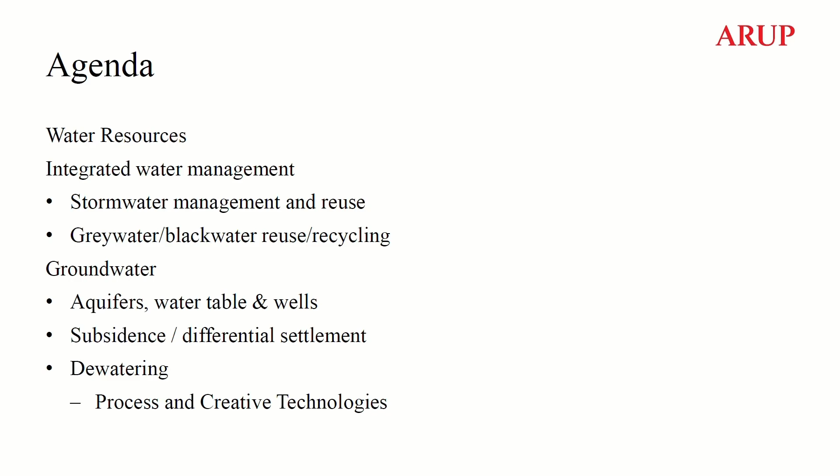So where is our water? About 97% of it is in the oceans. It has salt in it, so only about 3% is what we call fresh water, and of that, an even smaller percent is what we think of as a normal surface water source, like lakes and whatnot—only about 1%. There's a little more of that in groundwater, but for context, there is a lot of water in the world, it's just, if you don't know where it is, it's probably somewhere else in the cycle—it's probably in the ocean.

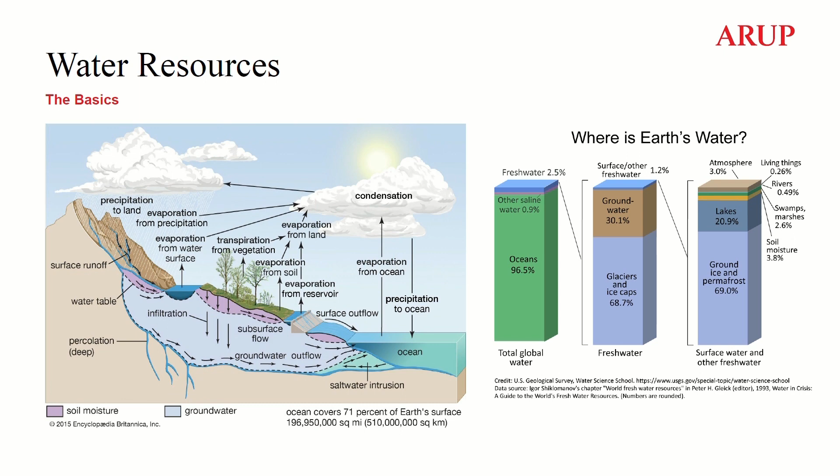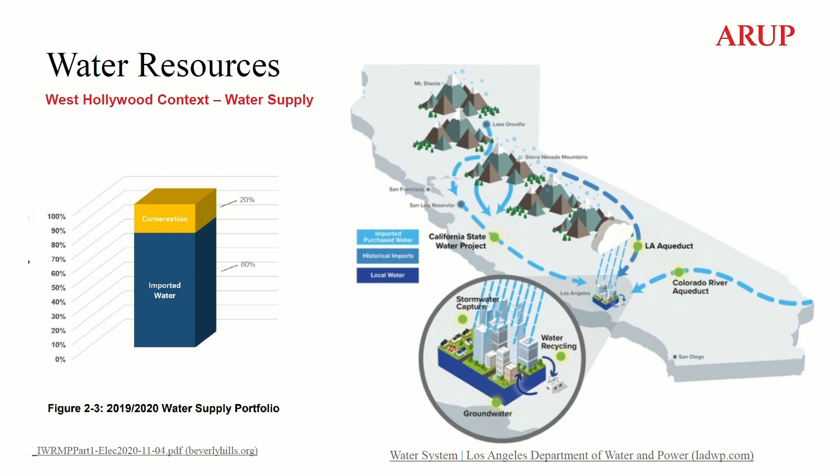But there's also a great little pop-out showing the local water sources, which includes stormwater capture, groundwater, and water recycling. And those are really what I want to focus on today, because those are part of the integrated water management that I'll be talking about.

Before we talk about integrated water management and that strategy, I think it's really important to define some terms that we've probably heard but maybe don't know exactly how they're defined. Potable water is water that is safe for drinking and showering. It's what comes from your municipal source, it comes right to your tap when you turn the water on. Non-potable water is exactly how it sounds: it's not drinkable, but it could be used for things like toilet flushing or watering plants.

Gray water and black water are both terms to describe types of wastewater. Gray water is wastewater that comes from sinks and showers. It doesn't include any organics from kitchen sinks or sewage from toilets. Black water would include all the wastewater, including that sewage from toilets and whatnot. Those two terms together are what we would call wastewater.

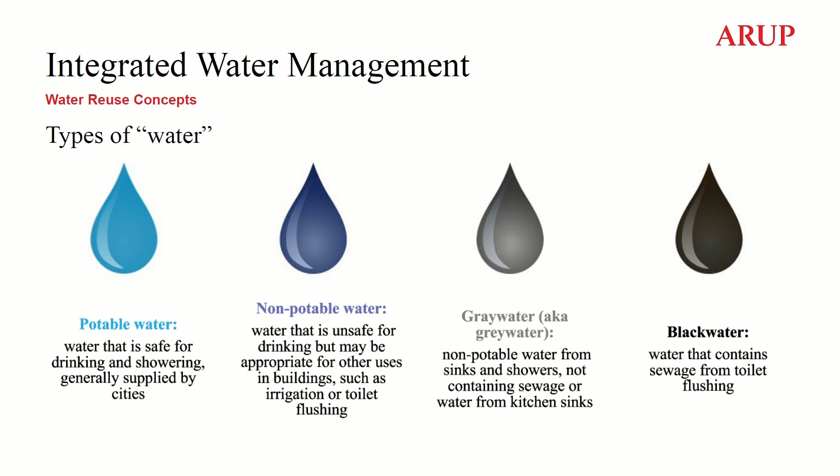Now that we know about those things, I can get more into the strategy of what we think of as integrated water management. This is basically the thought process on how to manage your water sustainably and holistically through the water cycle. Some of you might have heard the term net zero in the context of GHG emissions or energy. We also use net zero as a term for water use.

When you're trying to get to net zero, or when our clients are trying to get to net zero, what we try to do is say: how do you offset all of your potable demands from somewhere like a municipal source? You either reduce your demand, through conservation and efficiency, or you look at alternative supplies, like stormwater reuse, gray water recycling, black water recycling, or things like groundwater recharge and groundwater reuse.

Conservation and efficiency are definitely the easiest, the ones that people know the most about, but there's only so much that you can reduce your demand. You have to use some water. Even places like Las Vegas, where their water use is so low, I don't even know how they do it, you have to have some kind of alternative supply or offsets to get to that net zero.

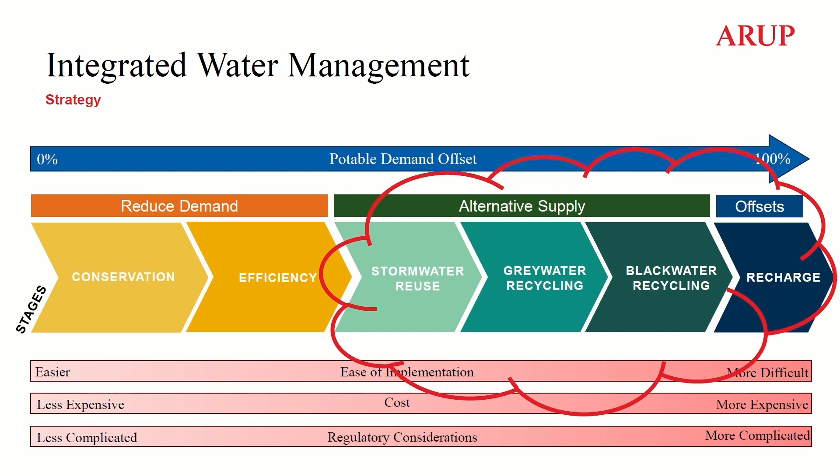Like Rick mentioned, there are water quality considerations with stormwater. Usually if it falls on a rooftop, it's cleaner than if it falls on something like a parking lot where there's car grease and whatnot. But usually some kind of treatment is necessary, especially in bigger developments and buildings like this.

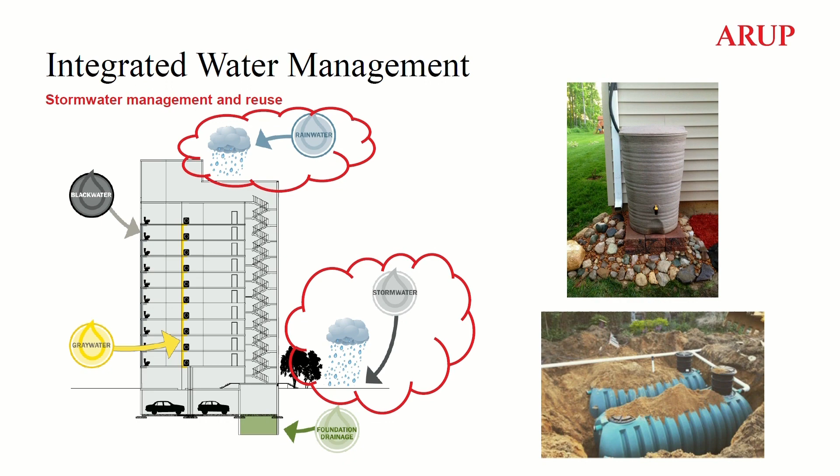So on to gray water reuse. Gray water reuse is capturing the gray water, which we talked about earlier, from washing machines, sinks, and showers, and putting that into a tank and reusing it for things like irrigation or toilet flushing. This does require some water treatment, probably a little bit more than for your stormwater, depending on what's in that.

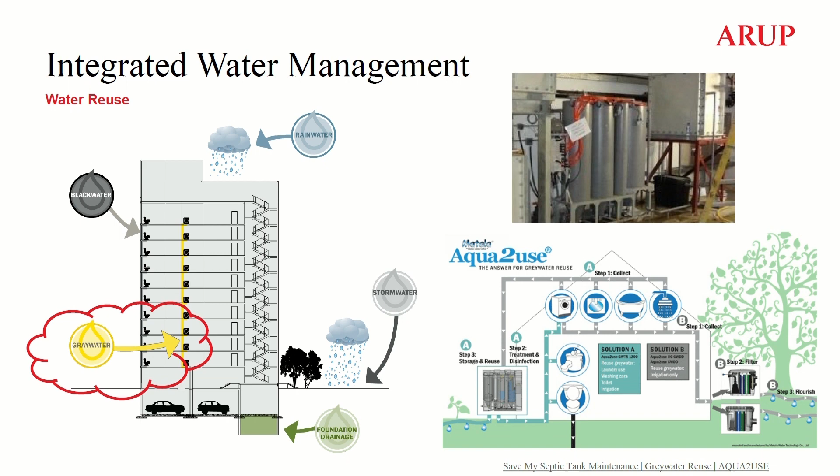Another thing you could do is black water recycling. That would include all the wastewater from your building. This requires even more treatment than gray water. It's kind of like a mini water treatment plant that you would have at your municipal system.

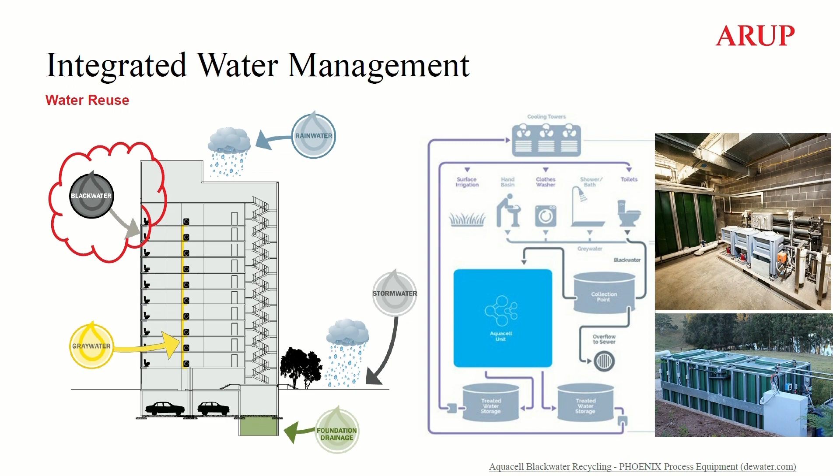I know Kim talked about heat island effect and everything getting hot. Well, what do we do when it gets hot? Turn on our air conditioners. Black water recycling and recycling of that water can be used as a non-potable source for cooling towers and cooling buildings. So it's a really good alternative supply for things like that.

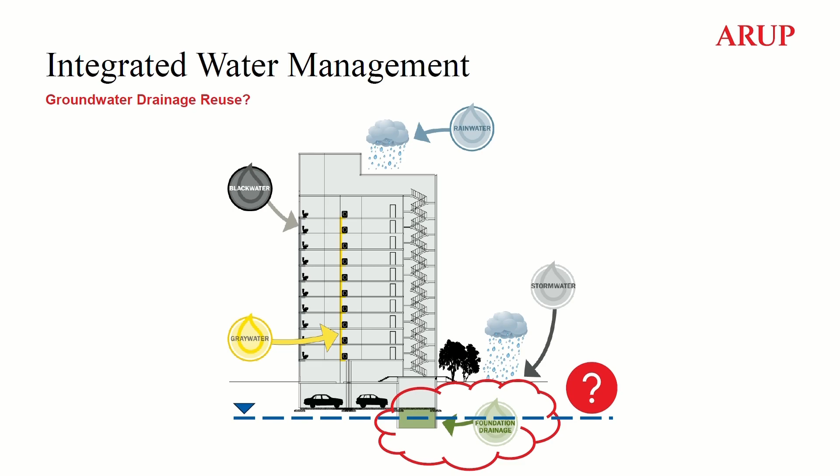Some of you with a really keen eye might have been looking at this figure and seeing this green arrow on the bottom and saying, are we really letting groundwater into our basements and then reusing that? Awesome question, I will get to that in a second. But first, we're going to talk about some of the basics of groundwater so we're all on the same page.

Groundwater, like we talked about, is water that falls from the sky, lands on the ground, and seeps into the soil and rocks underground. An aquifer is the name for that soil and rock underground where the water lives. A water table is the shallowest level of groundwater, and it's what we talk about when we say we have a high groundwater table or a shallow groundwater. Depending on your perspective, they're the same thing.

A well is something that's drilled into the ground to withdraw or pump water from aquifers. There are municipal drinking water wells, which usually dive pretty deep. But you can also have recharge wells, which are shallower.

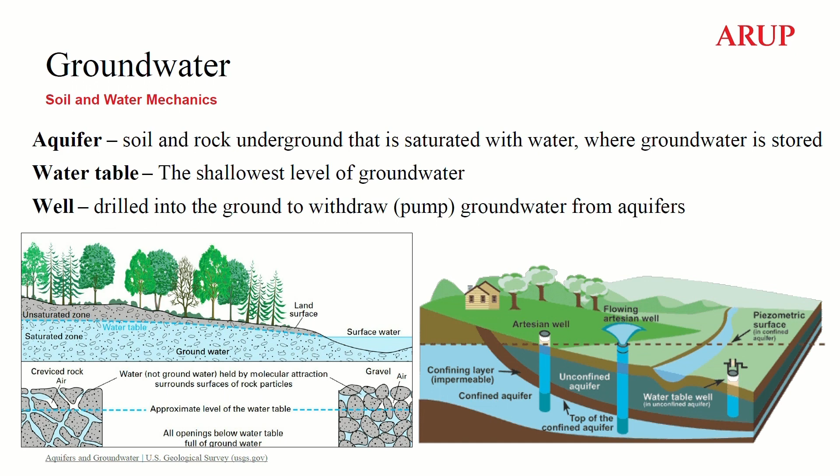So when you pull water up from the ground, pumping through wells, it removes the water from the spaces between the rocks and soil. When you remove the water from those spaces, sometimes the rocks and soil can compact on each other, and it can lead to groundwater subsidence and settlement of the ground.

One of my favorite shocking and crazy photos is there on the right. It's of land subsidence in the San Joaquin Valley. Basically, there's been a bunch of historical groundwater pumping and overdraft in that area, which people probably know about. But from 1925, there on the top, to 1977, the actual ground sunk about 9 meters, or 6 or 7 of that little guy, in that amount of time, which is a huge amount. And once the ground subsides, the aquifer is shrunk and there's no more room for water to be recharged back in. So there's nothing you can do after that point.

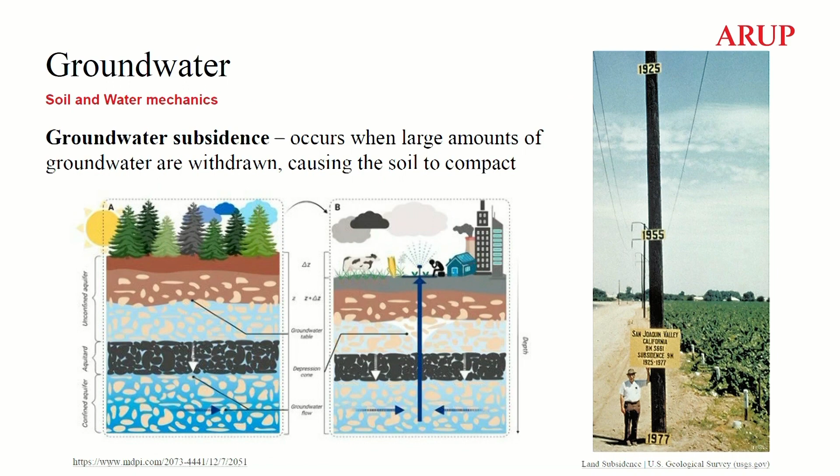So the hot topic of the day: groundwater dewatering and groundwater in construction. As we've talked about, groundwater in West Hollywood is relatively shallow, or there's a high water table. So when you go to construct a building that has a basement or an underground parking garage or something like that, you are going to run into some groundwater usually. Just like if you're digging a hole on a beach, you're going to find groundwater there. The really important thing to note here is that groundwater in this construction process can be really unsafe for workers, and it also makes it really difficult, near impossible, to actually build what you're trying to build.

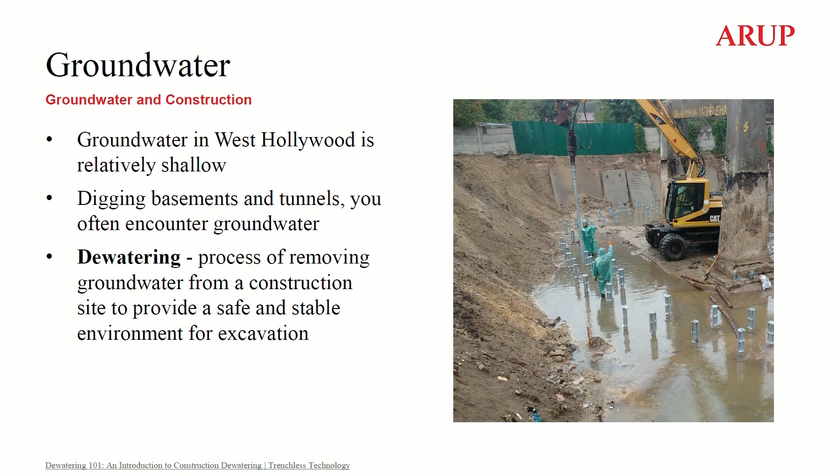So in order to figure that out, you have to do a process called dewatering, which is removing groundwater from that site to provide a safe and stable environment for excavation. So how does this work?

There are 2 different ways you can do it. One of them is blocking, which is where you would build a barrier or a cutoff wall around the area that you're trying to dig out. That would direct the water around that area, and then you could have dry and stable soil to excavate. It's usually something like concrete, you just shoot it into the ground.

The other way you can do it is by removing groundwater, which is what we're thinking of now as dewatering, where groundwater is pumped out so that in that local area, the groundwater table is lower so that you can dig that out. The important thing for this process is that you stay within your sustainable yield of the whole groundwater basin as a whole.

So groundwater basins are huge. They kind of manage themselves in that they have recharging systems - surface waters and rainwater recharging them, and then there's also water being pulled out. Because they're so large, they do a pretty good job of maintaining their water levels.

So what dewatering does, if it's within a sustainable yield, it only drops the water table at what's called the cone of depression around the well locally. So if you're within your sustainable yield, you're not decreasing the groundwater table in the whole basin - that would be bad. But it can lower that groundwater table in the nearby area.

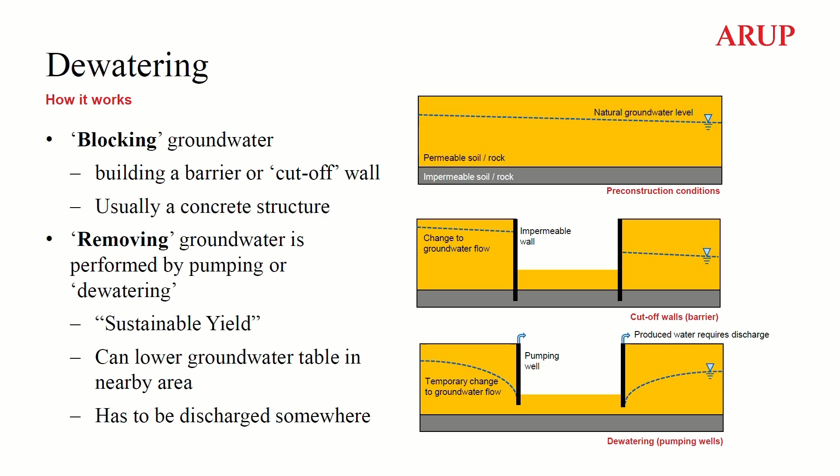The water also has to be discharged somewhere. So where is that water going? Some of you have seen it. Some of the disposal methods that are really common are on-site reuse - you can take that water, store it in a makeshift pond or tank, and reuse it for your needs during construction. That would be something like dust suppression, spraying down piles of dirt so it's not getting everywhere and ruining your air quality. That's a really good use for it.

Sewer system discharge and disposal to surface water both require permits and mandatory testing to make sure the quality of that water is good enough to be going into those areas. And then you can have off-site discharge, where you basically put the water into trucks and truck it away somewhere else where it can be reused, stored, or treated.

Really important considerations for this are, like I said, the water quality, if there's nearby users that can use the water, and then the potential impacts.

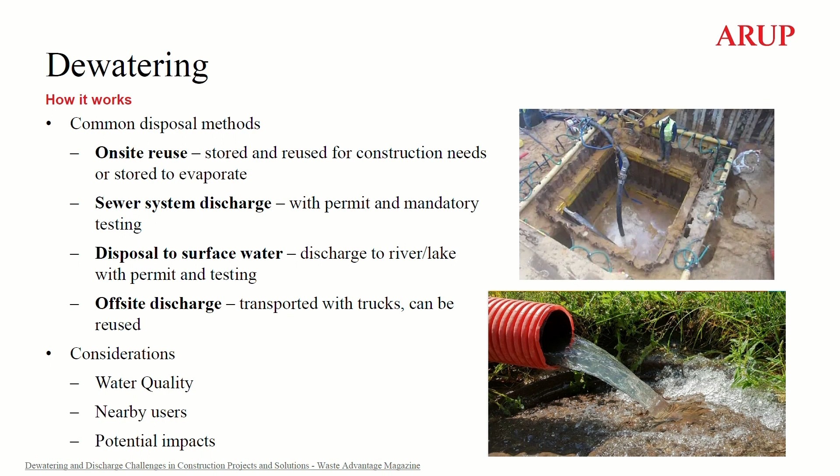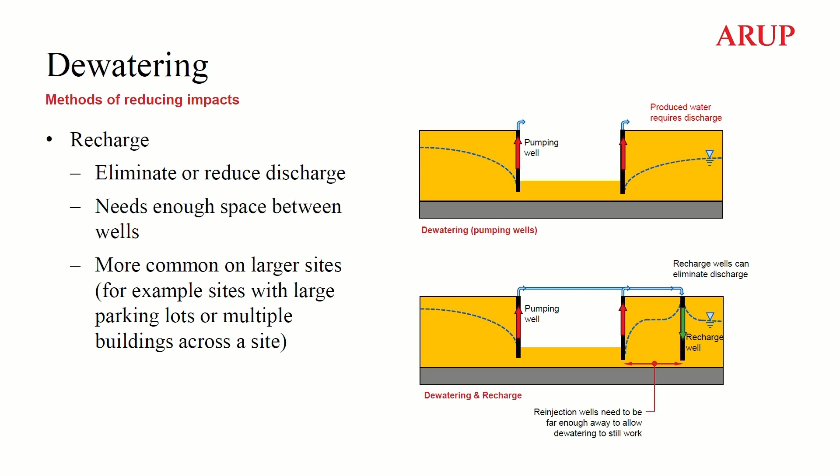So what are some things we can do if we think there's going to be impacts to local people around? One thing you can do is recharge the water back right to the groundwater where it came from. This reduces the need to discharge, so you don't have to worry about any of that. You can usually just not treat it and put it right back in since it's going right where it came from. The only issue is that it has to be quite a large site, because you can't put the water back right next to where it came out, or else that would ruin the whole purpose. But this is something that's very commonly done.

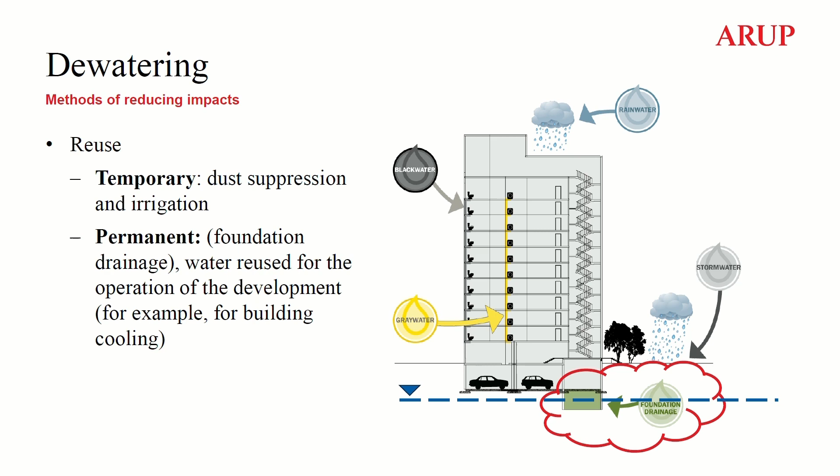And then the other thing, bringing it back to this figure we talked about before, is temporary reuse for dust suppression or irrigation, but you can also use that water for permanent reuse after construction is finished. This green arrow shows that you can let water into your basement and capture it, treat it, and use it for things like cooling a building, especially for a building that's large like this. A really cool example of that right nearby is the Cedars-Sinai Medical Center.

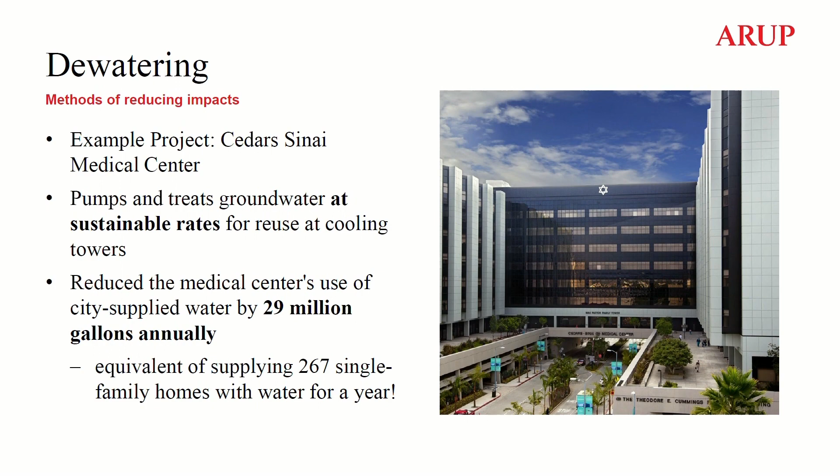I drove by it on my way here from the airport. This project actually pumps and treats groundwater at sustainable rates for reuse at their cooling towers. This has helped reduce the medical center's use of city-supplied water by 29 million gallons annually, which is equivalent to supplying 267 single-family homes.

So key takeaways I want to make sure we all understand: in order to manage your water resources sustainably, you need to look holistically through the water cycle, and reusing water is a great sustainable alternative supply. Another thing is that dewatering is often necessary, especially in places with high water table, to make construction safe for workers and to make it so you can actually build the building. But groundwater can be pumped at rates that are sustainable and don't degrade or deplete that resource, and it can also be managed in smart ways to protect local conditions, like reusing and recharging.

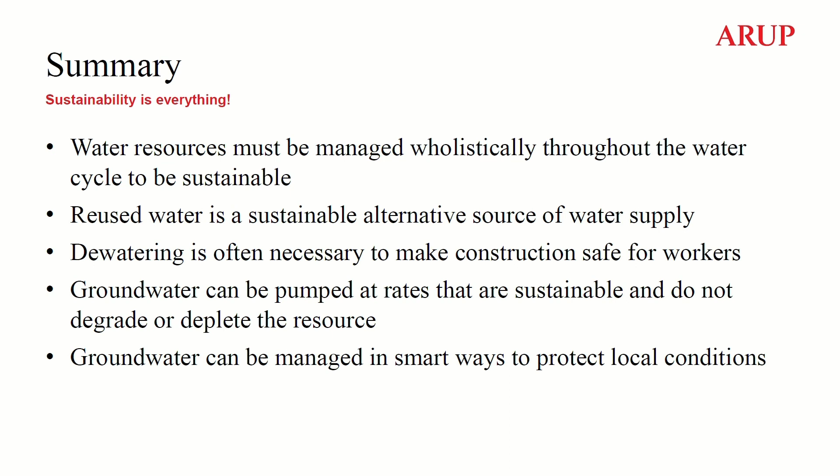Thank you. Thank you, Laney. We do hope that you are thinking of some questions because we imagine at the end of these presentations we'll have a nice, robust conversation. And I suspect construction specifics to West Hollywood might come up as well. So we'll be looking forward to that.